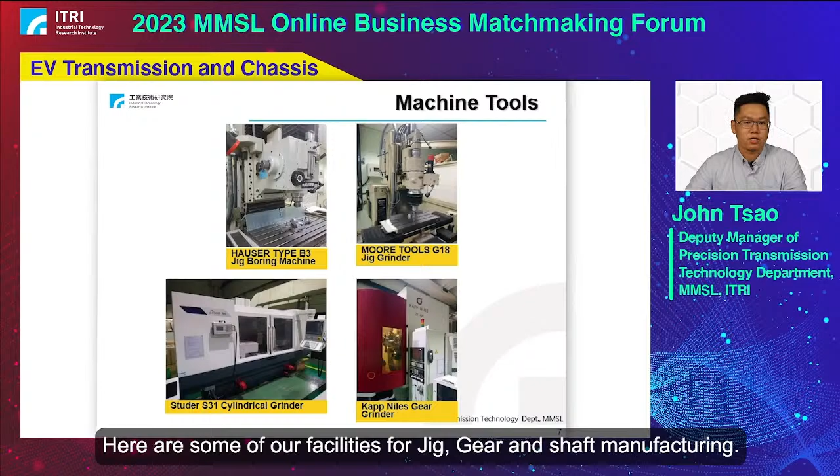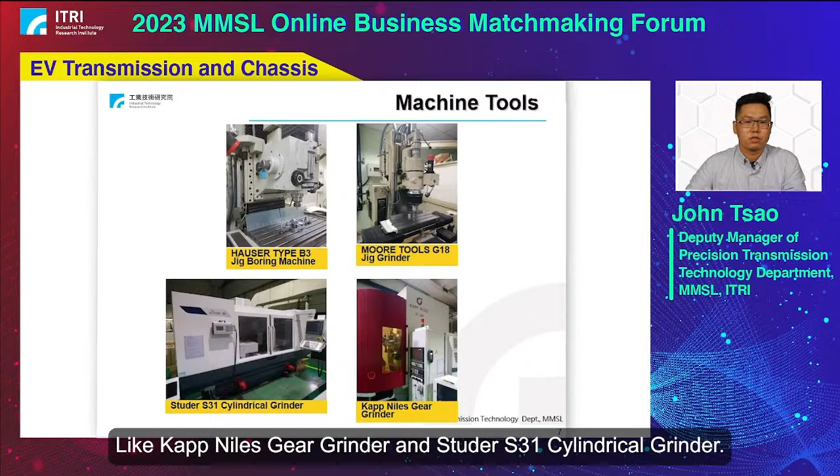We have a factory on our campus. Here are some of our facilities for jig, gear, and shaft manufacturing, like our Kapp Niles gear grinder and Studer S31 cylindrical grinders.

Also, for gear manufacturing process research, we have a heat treatment factory on our campus to test the heat treatment process for our transmission gears and shafts.

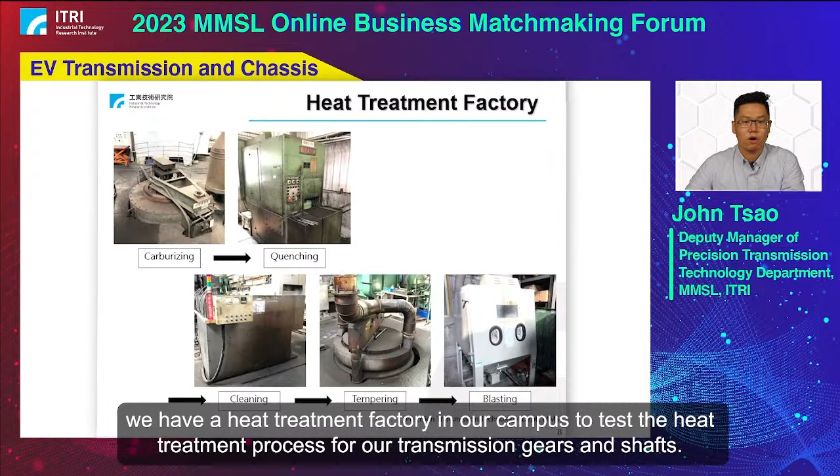For the NVH test equipment, we have the gear measurement and 3D dimension examination lab, as well as some NVH equipment.

For our EV transmission products, the first one is a 2-speed automated EV gearbox. It could apply to a 140 kilowatt peak power traction motor. We have completed the test bench test and vehicle test.

Here are our two-speed EV gearbox specifications. There are two types: the first one is with the synchronizer, and the other one is with the dual clutch.

Another EV transmission product is the single-speed EV gearbox, and we have 4 models for the single-speed system. It could apply to peak power from 120 kilowatt to 150 kilowatt motors.

These two are for the 120 kilowatt, with a single gear ratio from 3 to 8. Especially for the last model, it's a single output shaft and could be suitable for a small truck with a rear drive system.

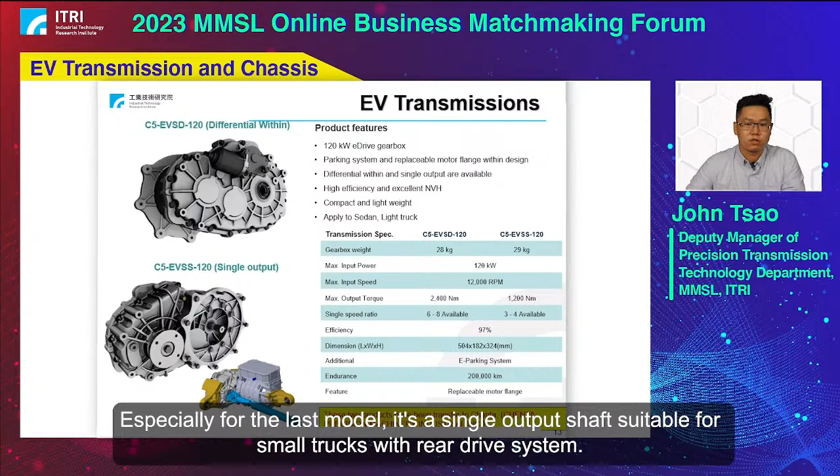For the e-bus and heavy-duty vehicle, we have an integrated planetary gearbox combining the gearbox and traction motor. It could apply to a 220 kilowatt peak power motor.

For industry reducers, for the RV cycloid reducer, we have two models now, with rated torque from 245 to 784 Newton meters.

For chassis development, the first one is our electric commercial vehicle chassis, and it could apply to a 3.5 ton commercial EV with a wheelbase of 3,300 millimeters. It's a rear drive system with a single-speed electric powertrain.

In this project, we have done the design and prototypes for the powertrain, frame, steering, brake, control, suspension, also its battery and transmission systems.

The other chassis project is for a 12 ton, wheelbase 3,300 millimeter heavy-duty vehicle. It's a diesel engine powered system with a 4-wheel drive transmission system.

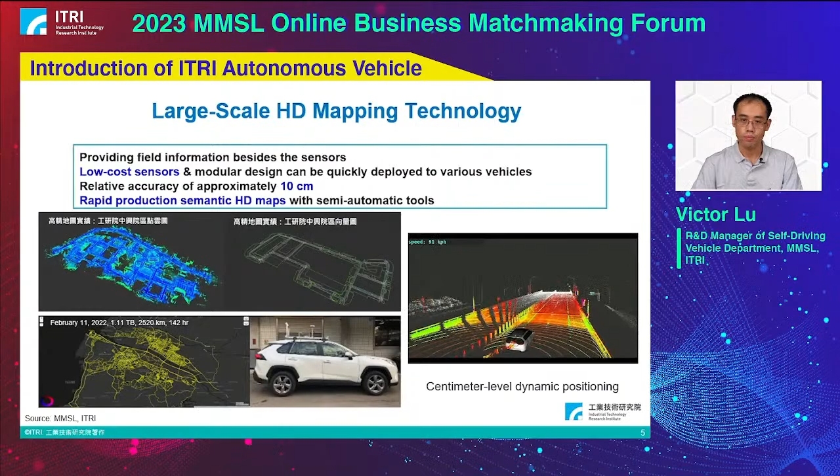The perception module is responsible for taking all these real-time sensor streams, combining and analyzing them, and in real time forming an understanding of its environment. This includes knowing the location and speed of surrounding cars, pedestrians, and even scooters.

In addition to these sensors for sensing the vehicle's surroundings, we can augment these senses with information from farther away. Roadside units with cameras from farther away, or even around a building corner, can share their view through wireless communication with the vehicle. This further expands the field of view that the vehicle has, so it can be safer and drive more performantly.

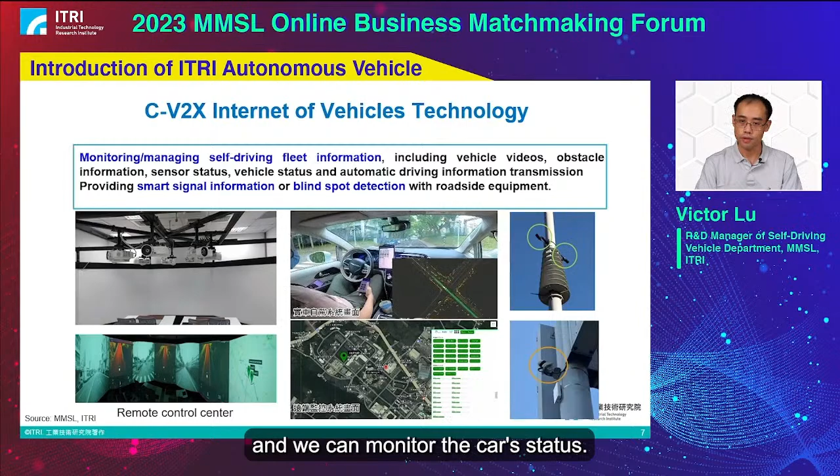Safety is probably the most important requirement of self-driving cars, so we place a lot of emphasis on it. We adopt a lot of safety standards, including ISO SOTIF and ISO 26262. In addition, we've developed a collection of simulation tools that allow us to simulate and test the functionality of our subsystems prior to actual deployment in the real world.

These simulation tools include purely virtual simulations, and also mixed reality simulations, where part of the signal inputted into the car is real, and it's augmented by fake virtual signals. I'll quickly show a video of this.

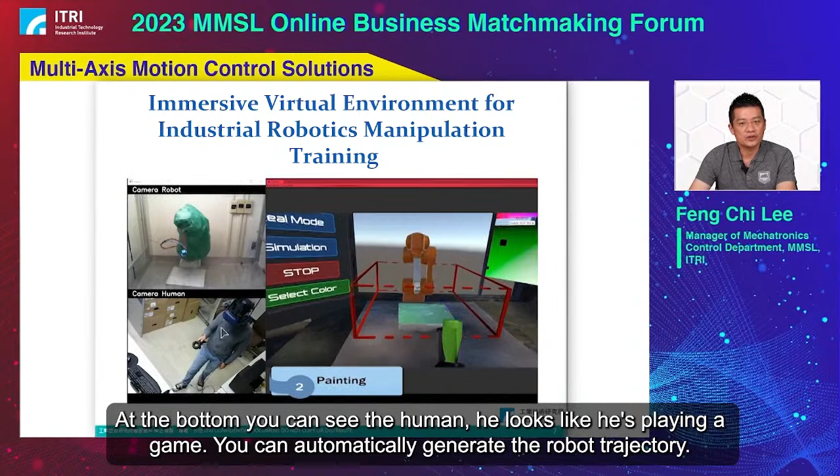We also focus on robot control, but this project we finished by integrating with virtual reality. On the right side, you can see a virtual robot. In the upper left, you can see a physical robot, and in the lower left, you can see a human. It's just like playing a game, you can automatically generate the robotic trajectory to finish the robot control.

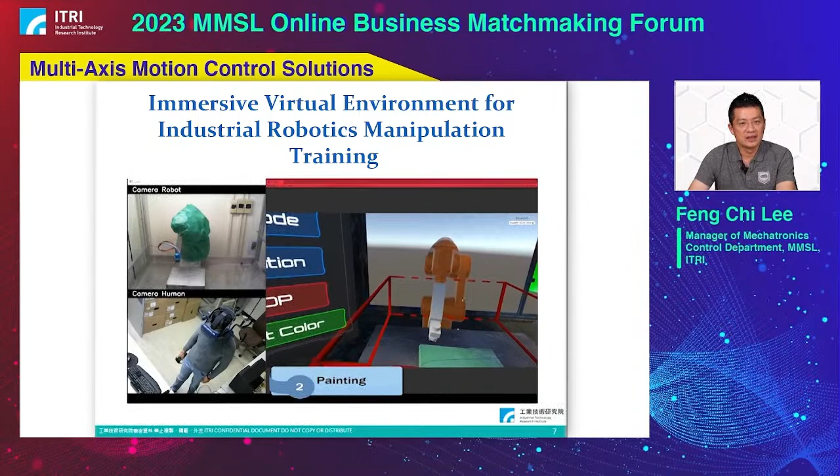In the traditional way, you don't need to code, but the software engineering is not easy to finish. Most importantly, you can avoid very dangerous and very hard environments, something like painting, polishing, something else. So this project integrates virtual reality - if you have any exchange, you can contact me.

This was also just finished last year. Also wanted to let you know.

After this meeting, I wish we can take a next step to cooperate closely with all of you. If you have any questions, you can contact me. Thank you.

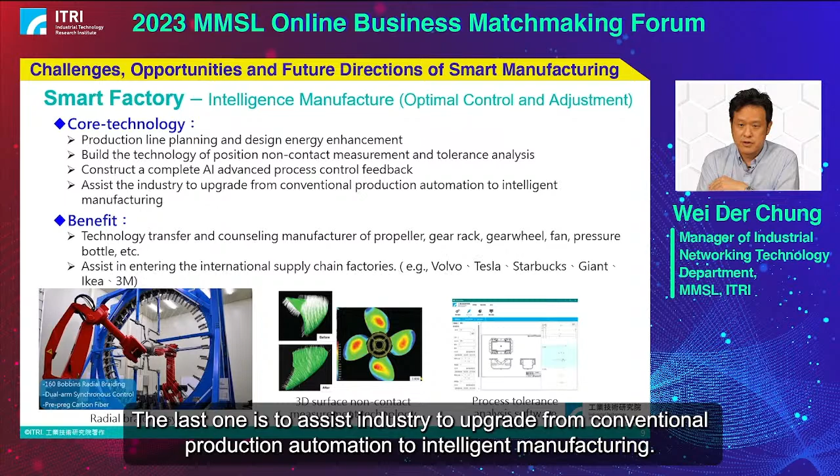The last one is assisting industry to upgrade from conventional production automation to intelligent manufacturing.

I think with those technologies, our main focus is to improve material efficiency and energy efficiency. In that way, we can achieve low carbon manufacturing and make the factory smarter.

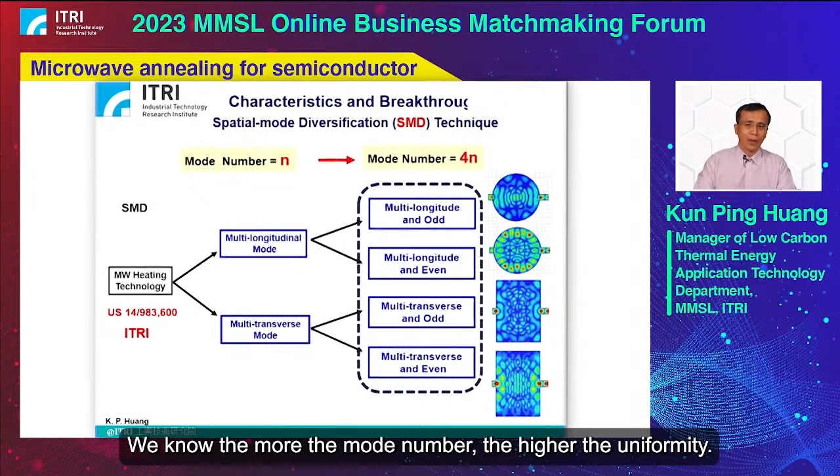My next technology is the time phase coupling technology. So how do we increase the mode number in the power supply? In the microwave transmitter, we use the half wave rectified power supply of the transmitter. If we enlarge the capacitor, it will make the overlapped coupling microwave. This kind of technology can increase the mode number 2 times.

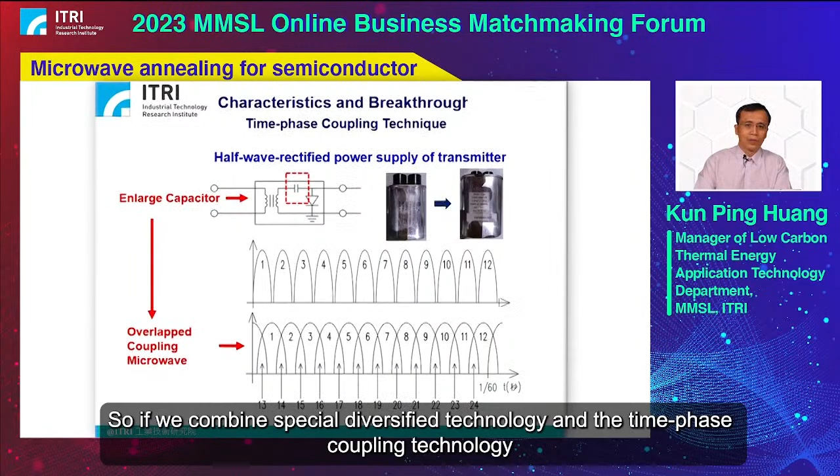So if we combine the spatial diversified technology and the time phase coupling technology, we can increase the microwave mode number 8 times. So it can increase the uniformity of annealing very well.

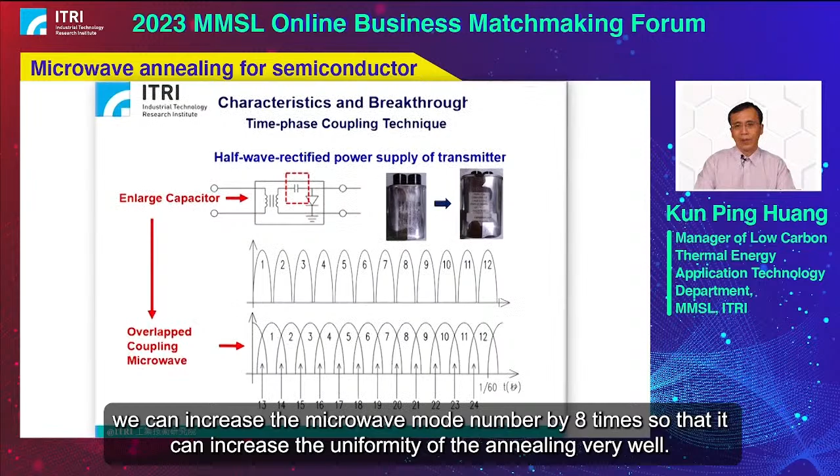Currently, the MOS structure has progressed into the gate-all-around structure. So if we continue to use the RTA annealing technology, it will cause dopant diffusion.

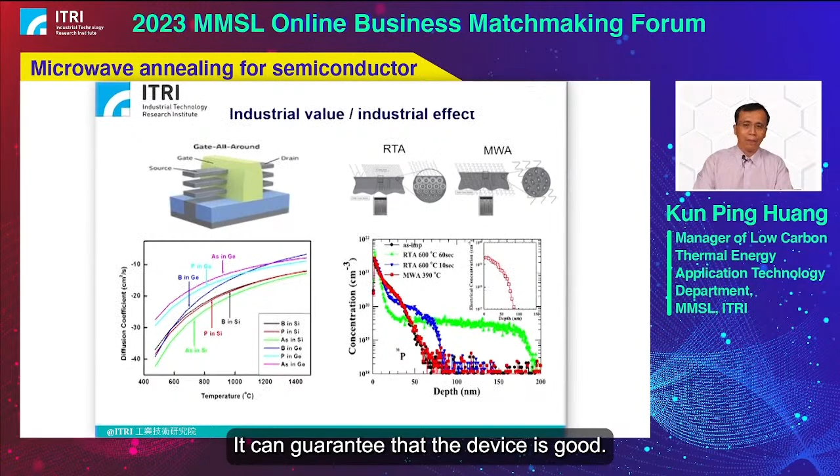In the figure we can see that even if the RTA annealing temperature is below 700 degrees C, in this case using only 600 degrees, it will make the dopant diffuse into the diffusion area, which will make the device fail. But if we use microwave annealing, the annealing temperature is only 390 degrees C, so we can see it will not cause dopant diffusion into the diffusion area. So it can guarantee the device is good.

This slide will show the coupling microwave mode advantage. If we do not use the coupling microwave mode, the uniformity of microwave annealing is only 4.1%. But if we use the coupling microwave mode, the uniformity will go down to 0.5%. In the semiconductor industry, the uniformity we can only accept is 1%, so in our microwave annealing technology, the uniformity is only 0.5%.

So our microwave annealing process can get good uniformity, which can meet the semiconductor industry criteria.

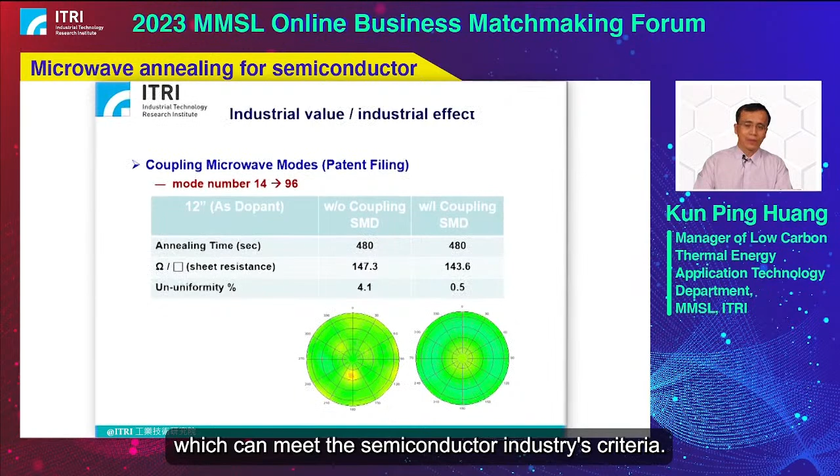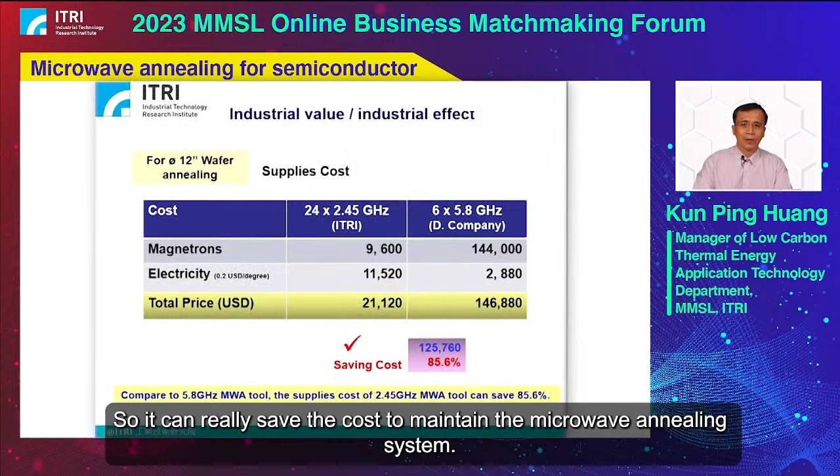In this slide, I will talk about the consumable cost compared to other companies. Our microwave annealing system can save around 85.6% of the consumable cost. So it really can save the cost to maintain the microwave annealing system.

In the final part, I will talk about the future development and application potential. The first is chemical synthesis. Because some chemicals can absorb microwave energy, it can save energy and process time to synthesize a new chemical.

The second is powder metallurgy, because in the future metal parts will get smaller and smaller, so microwave can also be used to do the metallurgy. The third is carbon fiber, because carbon can absorb microwave energy very well, so we can also use microwave to do carbon fiber synthesis.

And then for solar cells, because silicon and CIGS's chemical bonding can also absorb microwave energy, it can decrease the annealing temperature for their crystallization.

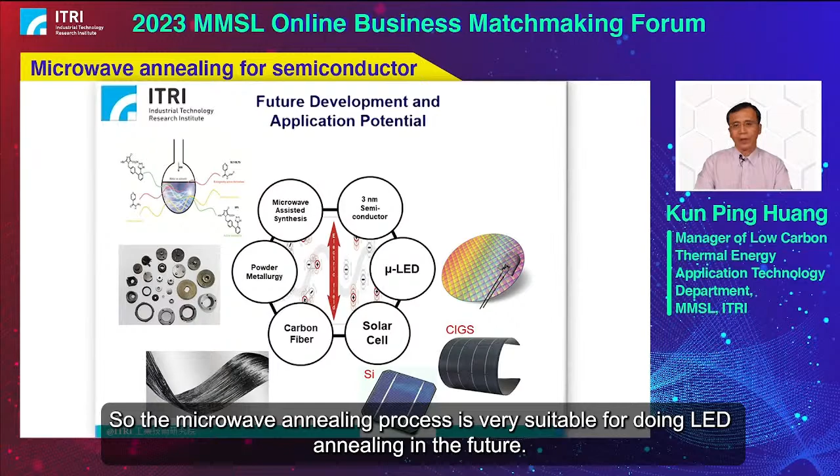And of course, for silicon semiconductors, because silicon is a covalent bond, it can absorb microwave energy very well. So it can use microwave annealing to do the device annealing, which can make sure it gets higher efficiency in the semiconductor industry. That's all, thank you.

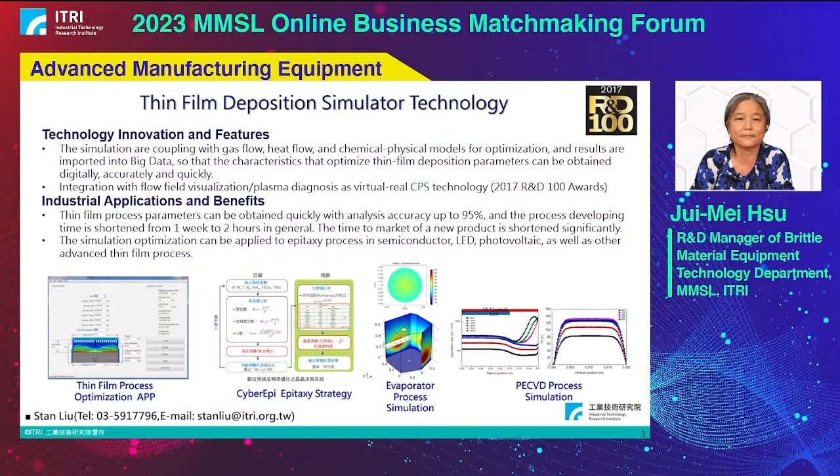Plasma has been widely used in thin film deposition for industries like flat panel display or semiconductor. ITRI has developed high density plasma sources for different frequency plasma systems, for example radio frequency, very high frequency, or microwave frequency. This high density plasma allows us to increase production capacity with low process temperature. It can also minimize film damage resulting from ion bombardment during plasma deposition. In addition, we may also incorporate diagnostic or feedback control systems to have stable process control.

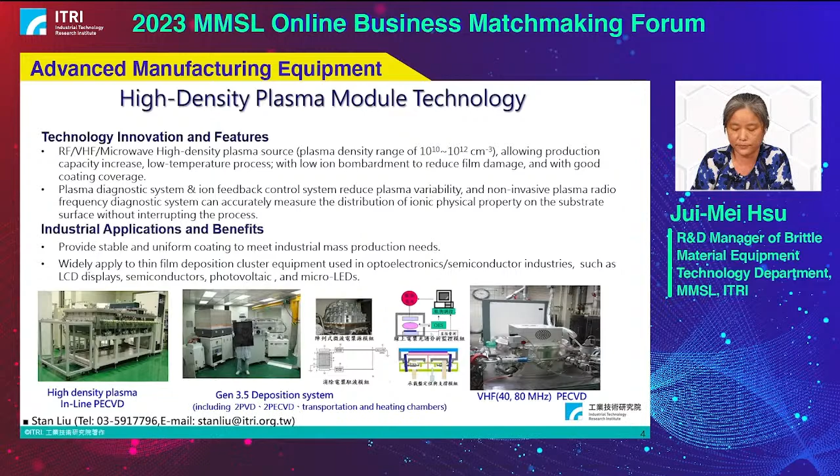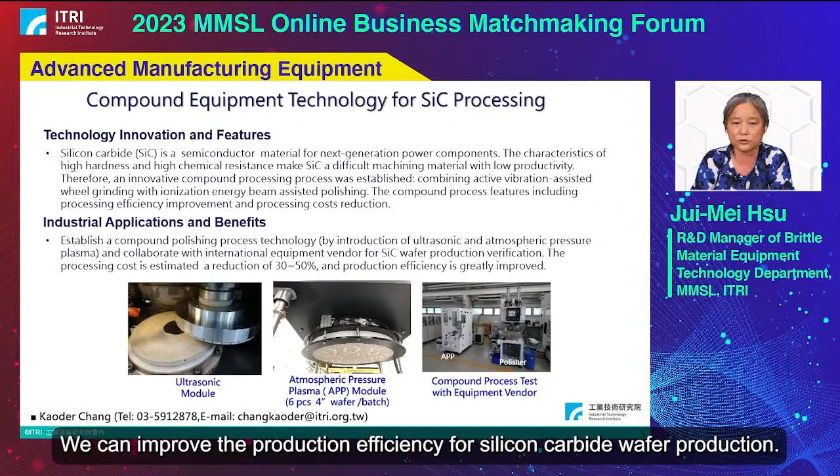Silicon carbide is a key material for next generation power components. However, silicon carbide has very high hardness and high chemical resistance, which makes it a very difficult material to machine or polish. ITRI has developed a process that combines ultrasonic grinding and plasma-assisted polishing technology. We can improve the production efficiency for silicon carbide wafer production, and this innovative process also reduces the process cost by approximately 30 to 50%.

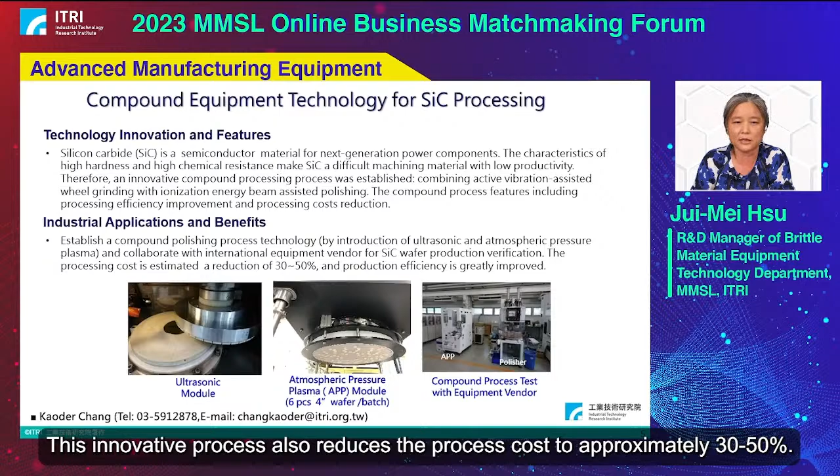Nowadays, the electronic packaging trend goes toward high density and high frequency transmission. Therefore, high via density with high aspect ratio becomes very important. Here we develop a copper electroplating technology for high aspect ratio vias. This via filling technology is void-free at aspect ratios larger than 20.

Also, this technology is an all-wet process. Not only is our plating process a wet process, but the seeding layer deposition is also done in a wet process. The seeding layer is traditionally done by sputtering, but here we can use our specialized formula to make it a wet process. Therefore, the cost and process time can be significantly reduced compared to the traditional via hole filling process.

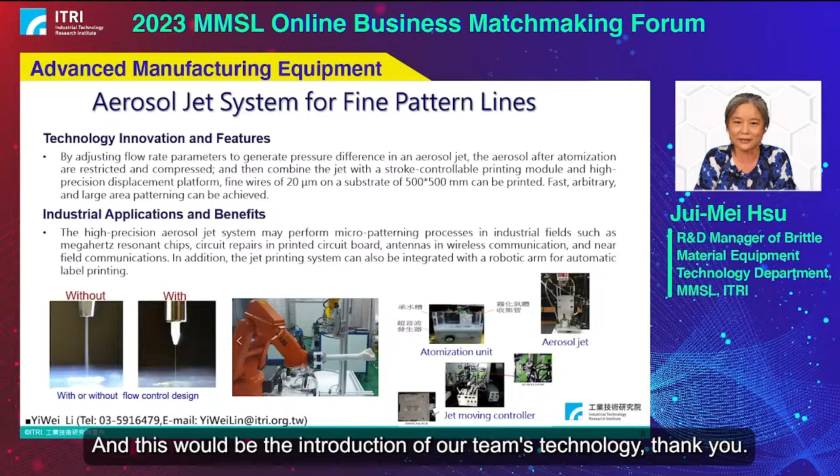This technology can also be applied in circuit repair processes. And this concludes the introduction for our team's technology. Thank you.

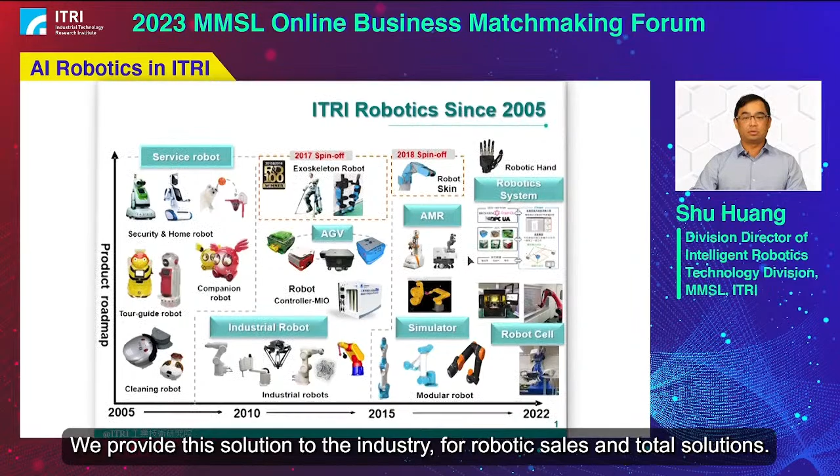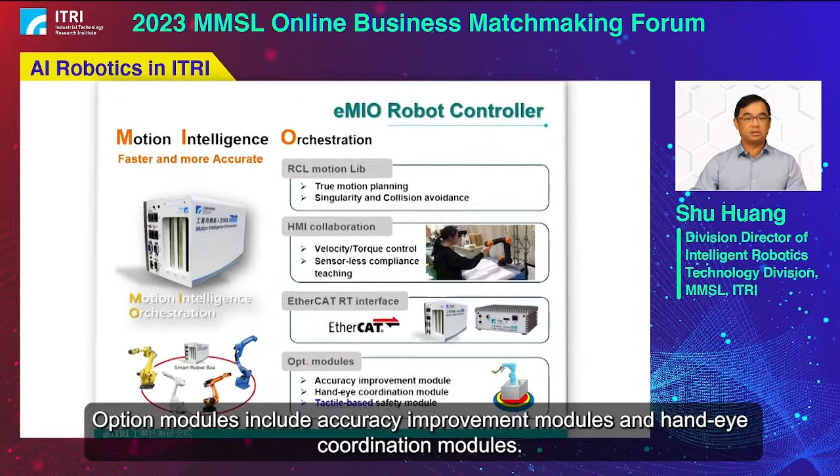Let's have a look at our eMIO robot controller. These controllers have modular motion libraries, including time-optimal motion planning and singularity and obstacle avoidance. We have better human-robot interface collaboration with sensor-less compliance teaching. We use an all-digitized interface for our controllers, and with the help of EtherCAT, the sampling rate can be up to 1 kHz. Option modules include accuracy improvement modules and hand-eye coordination modules.

CPS robotics is the current trend. CPS stands for Cyber Physical System. Our eMIO controllers handle the physical part of the robot control, together with the equipment and sensors, and our simulator, EasySim, handles the cyber part. We have a CAD offline editor and robot planning for trajectory simulation. We combine these cyber and physical parts for different kinds of applications, including grinding, polishing, welding, spraying, and painting.

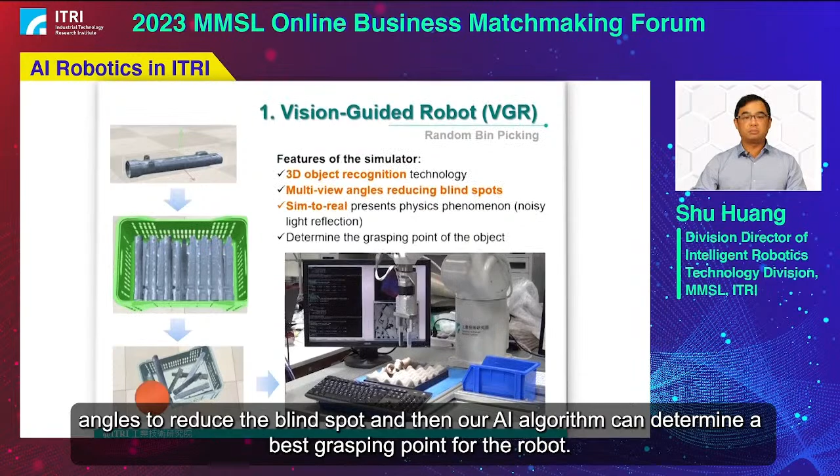One example of our CPS robotics is the Vision Guided Robot, VGR. Our simulator simulates the 3D of objects and can recognize objects from the environment. We call this example random bin picking. Our simulator has multi-view angle capabilities to reduce blind spots, and then our AI algorithm can determine the best grasping point for robots. This software can then be implemented in the real world, so our robot can, with the camera, pick up the workpiece from a pile of objects, as shown in the videos below.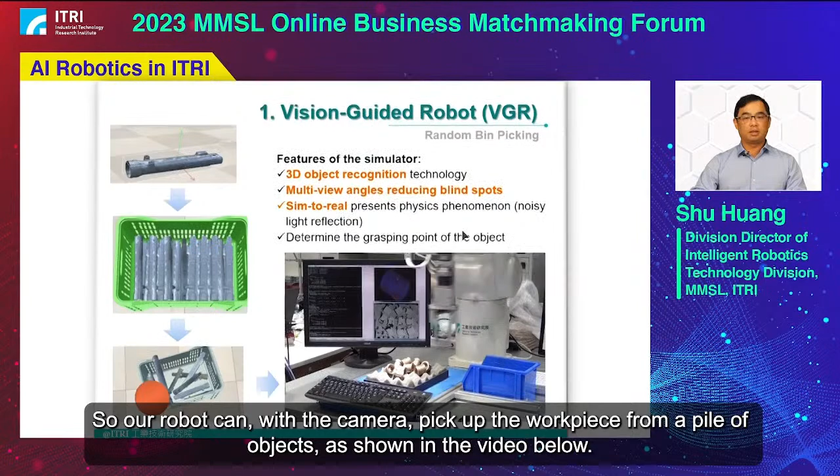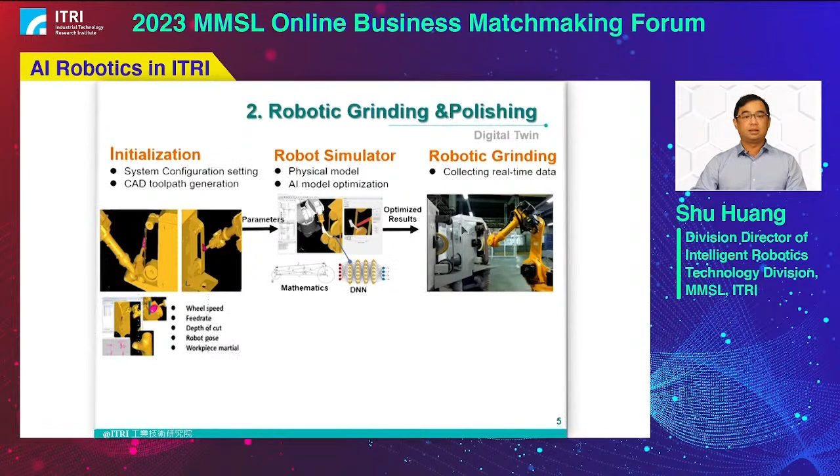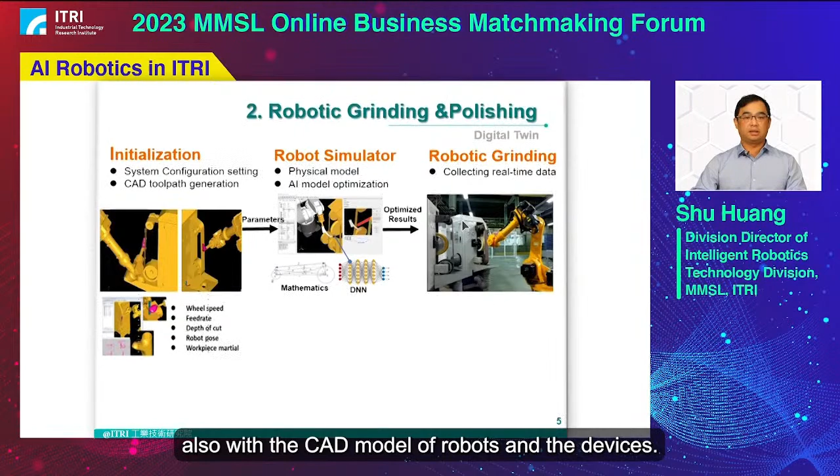Another example of CPS robots is a robotics grinding and polishing system. In the initialization stage, we import the CAD model of the object, along with the CAD model of robots and devices. Our simulator can then optimize and simulate the physical model with AI optimization algorithms. Here we optimize the position of the robot and also the trajectory of the working movements. In the end, we transport this software to a robotic grinding system.

In the meantime, we collect real-time data, creating another quality assessment feedback loop. We have an iteration process to improve the quality of the grinding robot, so it can manipulate and perform better and better.

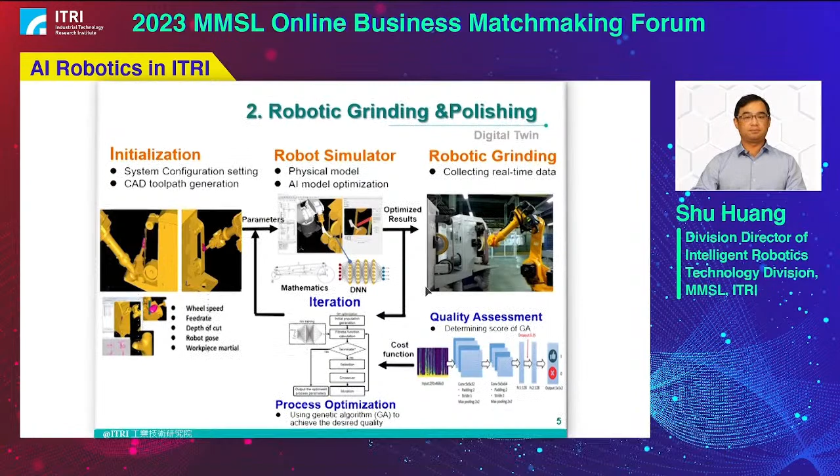Here we introduce our AMR, Autonomous Mobile Robot. This robot consists of a mobile platform together with a manipulator on top, along with our navigation software to handle navigation, mapping, and localization, allowing the robot to move around the workplace. We have multi-spot navigation algorithms and station parking navigation algorithms.

This AMR can be applied both in industrial applications and service applications. For industrial use, this AMR can transport workpieces in factories and also be used as an auto forklift. For inspection and surveillance, we have a Tai-power field detection robot.

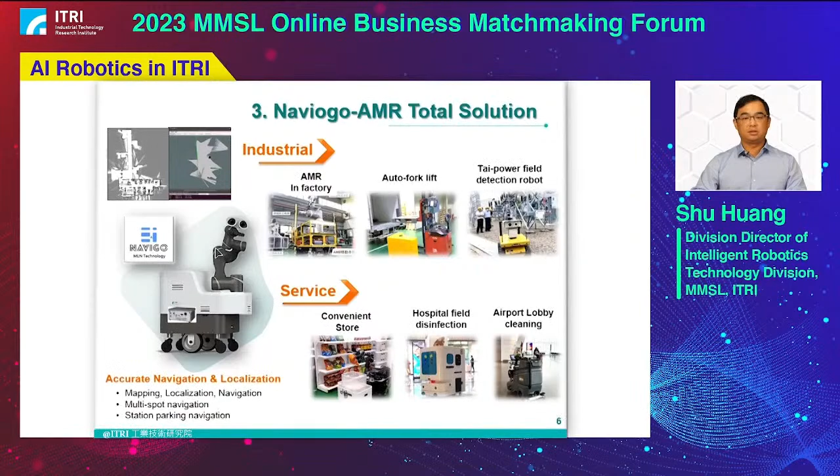Another part is the service application. In convenience stores, you can see an AMR moving around to pick and place goods. This robot can also be used in hospitals for disinfection, and in airports or train stations for cleaning.

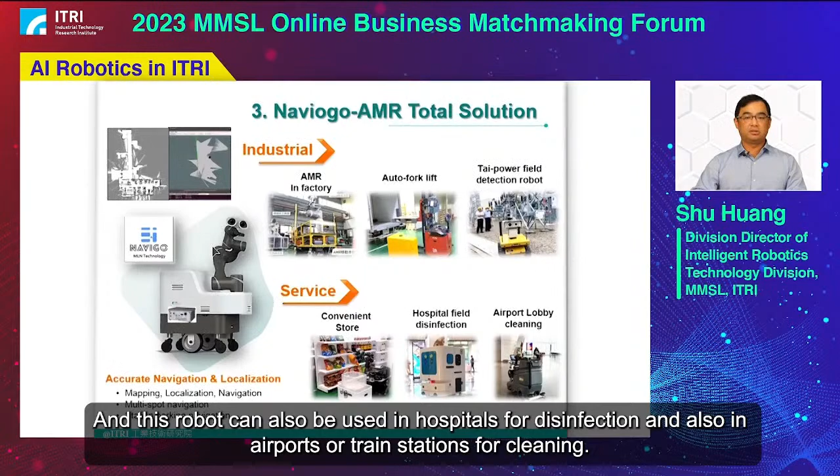We also extend our simulator to a bigger metaverse, what we call the robotics metaverse. We leverage powerful computing power from NVIDIA, so our RoboTwin has the function of AI, Omniverse realistic simulation, and an SQL database. We use this as a basis to apply robot twin technology to various applications.

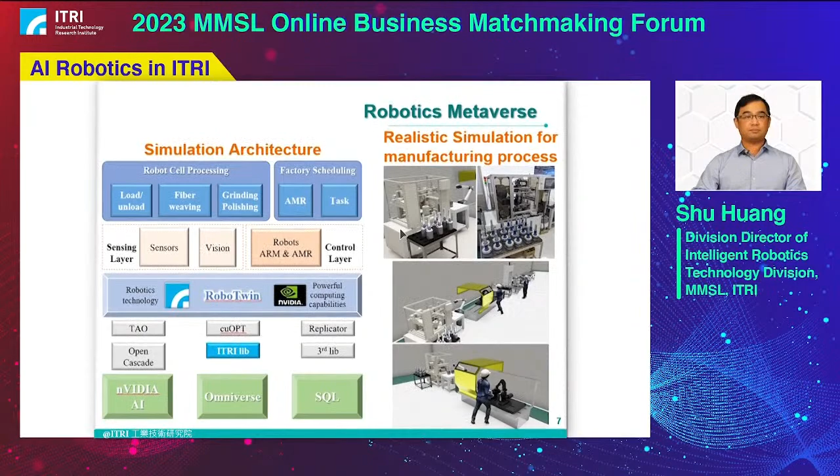We also extend our robotics applications to medical use. The first example is a robotic spine surgery system, with a software-enabled robotic arm and intelligent medical image guiding. This highly accurate robotic system can assist an operator in performing surgery. We are now in the process of accelerating the time to market.

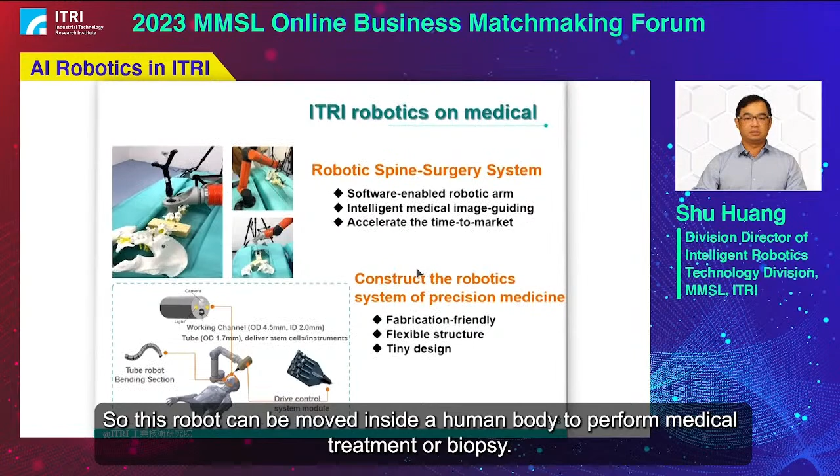Another interesting innovative medical robot consists of a tiny design and a flexible structure. This robot can be moved inside the human body to perform medical treatment or biopsy.

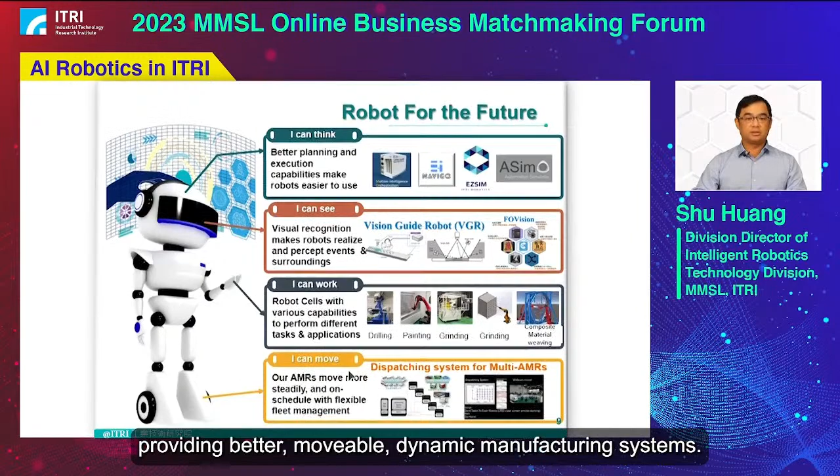In the last part, our AMR systems can be used in both industrial and service applications, providing a better, movable, dynamic manufacturing system. That concludes my presentation today. Together we build a better future.